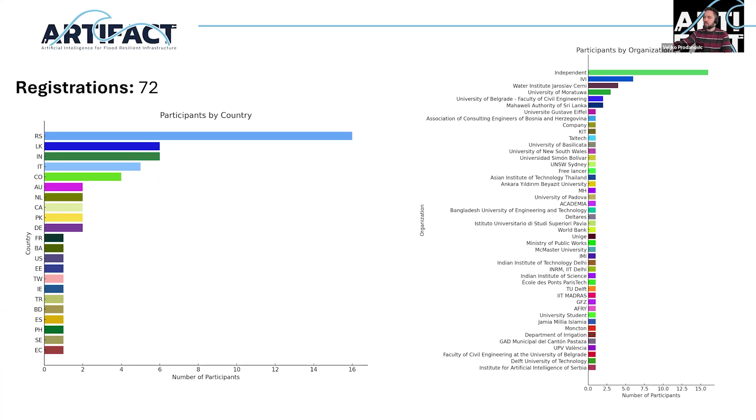I know there's a lot of young researchers among us today. Please ask whatever you think is relevant, or maybe it's not relevant, but you're just interested to ask either Zoran Vojinovic or Kapelan or ourselves. So please engage with us, it would be great to hear your voices. We have 72 registrants for today's event from very diverse countries across Europe and Asia, and most of them are from academia or research, but we have quite a few people working in business or industry sectors. So we have a nice diverse crowd today.

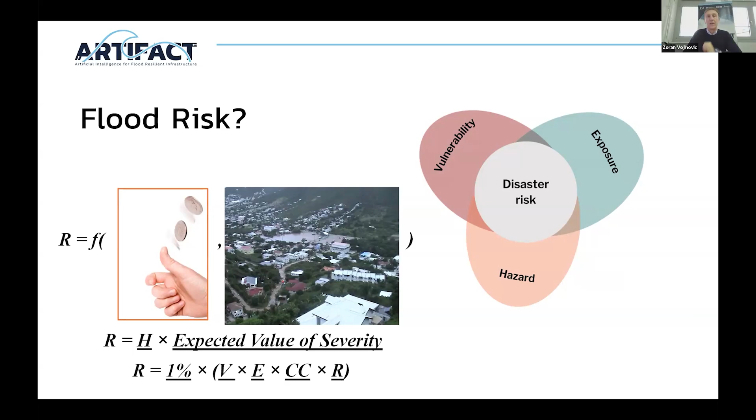Another important point: when we do flood modeling, we choose a particular event to calibrate the model. Once the model is calibrated and fit for purpose, we proceed with running different scenarios, choosing rainfall of different characteristics, such as a potential 1-in-100-year event, a 1% probability. We run the simulations, produce flood maps, compute impacts and damages, and state that there's a 1% chance this event occurs with this potential amount of damage. If we use a 1-in-10-year event, that's a 10% probability, and so on—we can go with 20 years, 50 years—and this is what defines the probability of flood risk.

Since we're going to be doing the modeling, the models are used to estimate the hazards. A hazard is a phenomenon which has a potential to harm humans, so it is a threat, not the actual event. Typically, for our purpose, it is flood water resulting from an event.

Moving on, different rainfall events can be ranked in different ways. You can use variable plotting position principles to rank a series of events, saying this is my 1 in 100 year, 1 in 50, 1 in 20, and so on. Then you use these events to run through your models, and what you get out, if it's 1 in 100 year, is a 1% probability for that particular scenario to occur.

A couple of words about vulnerabilities, because I mentioned hazards in the context of risk. Another important dimension is vulnerability. There are many different definitions in the literature. It can be defined as an inability to avoid potential harm. The disaster risk community defines vulnerability in different ways - I Googled recently and found maybe more than 30 different definitions, but I'd like to stick with one: vulnerability as an inability to avoid potential harm.

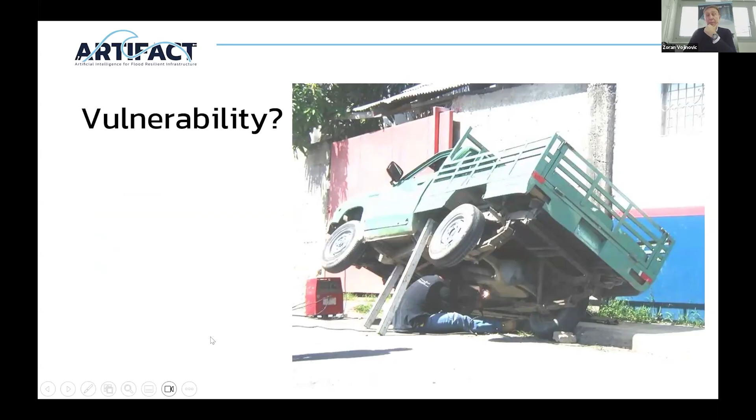These are some sketches to illustrate what vulnerability is. This is a guy who's trying to fix his truck. Obviously you'd say he's vulnerable - the likelihood that he may get injured depends on the poles he's using to keep this truck up. So obviously we'd agree he's vulnerable. You can come up with many examples - other guys working in a particular environment, not very well protected, you'd say they are vulnerable. You can find these kinds of examples in many places.

As I said, typically we break it down to at least two dimensions: hazards and vulnerabilities. Again, vulnerability is one side of the coin - on the other side some people define resilience. Of course exposure is an important thing too. But in practice, particularly flood risk management practice, people combine vulnerability, resilience, and exposure into one and express it in a spatial map using GIS.

On the other hand, we have numerical models to tell us where the flood zones are, and we again represent it in GIS. Two-dimensional models are very convenient to produce flood maps because they're in 2 dimensions, which is much different from a result from a 1-dimensional model, which you need to extrapolate, causing all kinds of problems. So 2D models are great for hazard assessment, and we combine them with vulnerabilities and other dimensions to express the risk.

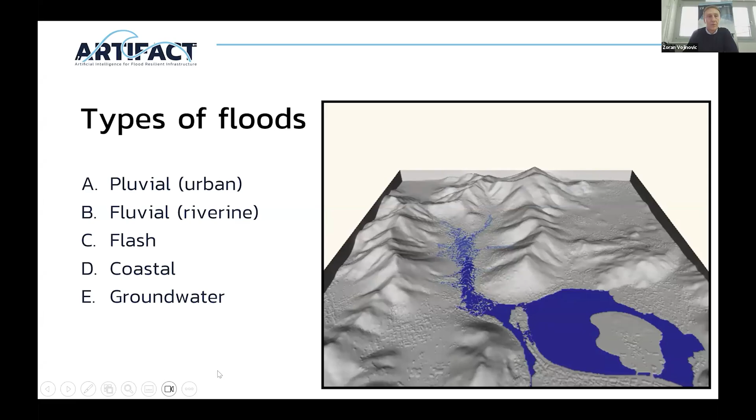And then, of course, you can have combinations. If you have an urban area situated between the coastal zone and also has a river system next to it, and maybe some hills as well, you may find all these combinations. Not very often, but it may happen. So I will speed up through this. This is an example of flash floods from hilly terrain, and this is a simulation of a 1D, 2D model, which I will come to in a bit.

So from the numerical models, when we aim to go into the flood hazards, we obtain water levels, velocities, durations, and maybe if we are dealing with water quality issues, we may also run some advection dispersion processes, and then get concentrations of pollutants. These are the typical variables that we get from our numerical models that we can use to produce the hazards.

Of course, our choice of what to use to produce our hazards will depend on the physics, the terrain, and the type of flood. If it is very slowly moving water, as with some fluvial floods, the water can propagate very slowly in time. In that case, your velocities are not that dominant, and you may end up just using the water levels and perhaps durations as your key variables to express hazards.

If you're dealing with flash floods, then velocities are very important, and you may combine them with water levels, and maybe not so much with the duration of these events, because they can sometimes take just minutes or maybe an hour to dry out.

And if you are concerned with water quality in urban areas, particularly with a mixture of sewage in combined systems, then you may want to look into the advection dispersion processes and the concentration of pollutants into the flood waters. Okay, well, this is what we get from our 2D models, but I will come back to it later.

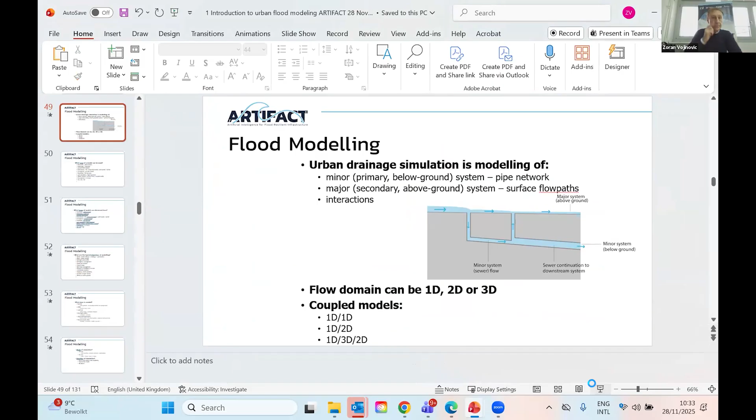I would like to now briefly touch upon some other things. I'll just jump through these presentation slides. Talking about flood modeling, we can look into the drainage system, because the focus of this lecture is on urban areas. What can we find in urban areas? Typically, there is the major and minor system, as people call it. In some places around the globe, they call them primary and secondary. Whatever the case, we will have a pipe network system, which consists of pipes, and can also be in combination with open channels.

We'll have manholes, and there could also be some pumping stations, overflows, things like that. And then you will also have water running across the streets. So at some point, when the pipe network system surcharges, the water will pop out from the manholes and run across the streets, and later the water will also be collected through the catch pits or gully pots, and come back to the drainage network. So there is a continuous interaction between the below ground and above ground systems, and that sometimes plays an important role in our understanding of the physical processes, and our models need to take into consideration some of these interactions.

So the flow domain can be one-dimensional, two-dimensional, or even three-dimensional if you want to. And of course, the coupling between these models can be in the way of coupling two one-dimensional models, or coupling one-dimensional and two-dimensional, or you can even incorporate a third-dimensional model.

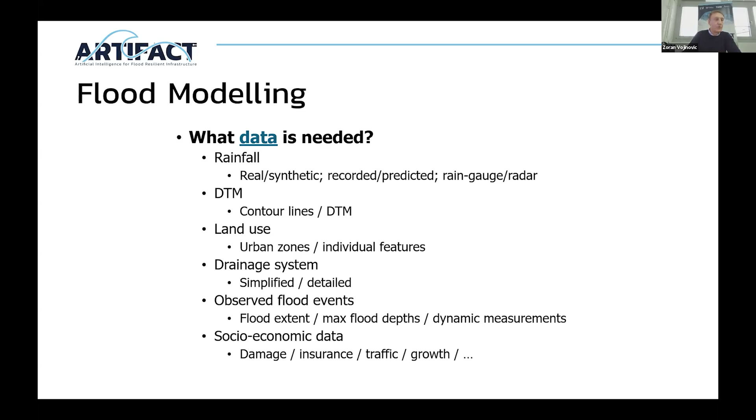Sometimes we're dealing with very scarce data, the amount of data can be very little, but even then we can set up the models. This is where physical-based models are good, because they're based on physics - even with little data, you'll be able to produce results you can make use of.

In terms of the mode of simulation, typically you can run models offline or online. If you're using models for real-time control and operational purposes, you can connect them and run them online. Otherwise, if you're running models to assess impacts from different scenarios, previous or future events, that would be an offline mode of simulation.

Duration of simulation - more complex models compute the entire domain, particularly with two-dimensional terrain and high resolution, which takes much longer than running only a 1D model without connecting 2D models. The size of the system, complexity, and type of model matter too. A simplified equation like a kinematic wave versus full dynamic wave makes a difference in time, and of course it depends on the hardware used to run the simulations.

I'll just mention quickly the different flood modeling approaches, and then we're going to break for 5 minutes.

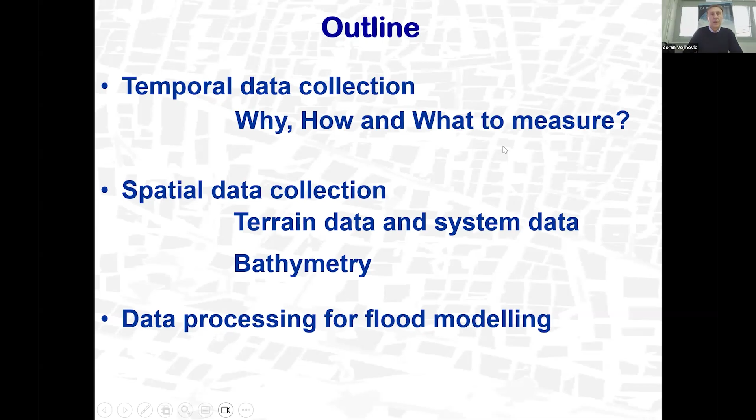Most of the slides I'm showing here come from these two books, Urban Hydroinformatics and Flood Risk and Social Justice. So the question is, why data collection for temporal time series data, which is typically rainfall, water levels, velocities, or discharges.

If we are dealing with water systems in urban areas, utilities, we obviously don't want to have a problem with malfunctioning of our system. So we need to learn how our system works. Besides knowing where the pipes are, we need to know how our system responds to dry weather flows and wet weather flows.

We need to answer many questions as we deal with such data and systems. For example, a typical question is: do the stormwater pipes surcharge when it rains 10, 20, 30, 100 millimeters an hour? This matters because water managers need to know if they will block traffic in certain areas or inform the public not to go there.

Another question that often comes to water utilities and urban water managers deals with combined sewer overflows or sanitary sewer separate overflows: will these overflow points spill when it rains? What magnitude of rain will cause spilling? And how much of that spill will get into the receiving environment?

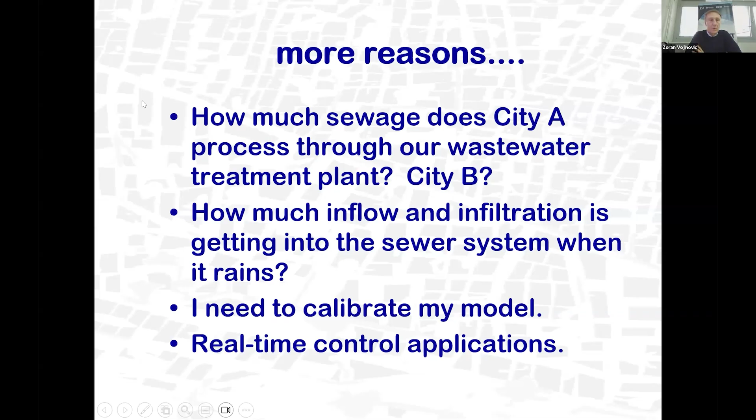But for our discussion today, we very much need this data to calibrate our 1D and 2D models. Of course, you can also use it for real-time control applications and many more things. So what do we typically measure and how do we measure it?

We use sensors and meters, structures in the pipes. We can install structures to measure the flows, or use portable devices. What's typically measured is the depth, water depth or water level, and velocity, and of course we can combine these into quantities, into discharges.

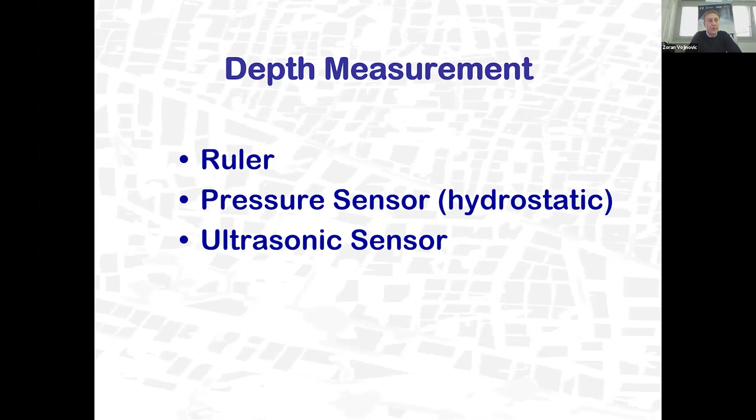The depth measurements, the depth of flow, we can use rulers, pressure sensors, typically hydrostatic pressure sensors, or ultrasonic sensors, which are typically mounted on the top at the soffit point of the pipe, and then measure the space between the soffit and the water as it rises through the pipe network system.

In terms of the ruler or depth of flow stick, they are easy to use but very limited, because you cannot stay at a particular location and get readings for hours. You go at a particular time of day or during an event and take some readings, but they are very limited, and they may not be very accurate because debris and deposits in the pipes can make it hard to read the accurate depth. So that's a very limited device.

Pressure sensors measure the difference between the water and air pressure to determine the flow depth. To work properly, they need to be covered with the flow. The readings can drift sometimes, so we lose accuracy, and you need to recalibrate these instruments from time to time. Because pressure is an important aspect, and in sewer systems you may have different gases causing pressure changes, you may need an air vent to get proper readings.

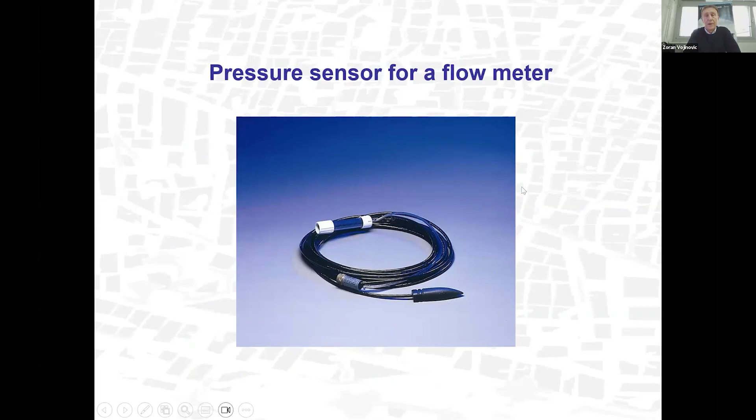This is an example of a pressure sensor - how it can look. It's typically on a cable, and you put it at the bottom of the pipe, fixed on a ring, and the other end of the cable goes into your logger for installation. The problems are: if there is too low flow, you will get scattered data readings, and sometimes we can experience loss of power.

Ultrasonic sensors can be used for depth measurement. They measure the airspace above the flow and use sound reflections. As they use sound and reflections, they may run into problems if there are road works where workers drill the surface and create noise that may interfere with your readings - that's something to be aware of.

Ultrasonic sensor instruments use an ultrasonic signal around 40 kilohertz, which humans cannot register, since our hearing range is between 20 hertz and 20 kilohertz.

As I said, they can be affected by noise and signal direction. This is a typical flow meter installation where the sensor is installed on a ring, and the other end goes into the logger and hangs in the manhole. From there we can receive the data wirelessly in our office, or you can come with a computer and download the data on the spot.

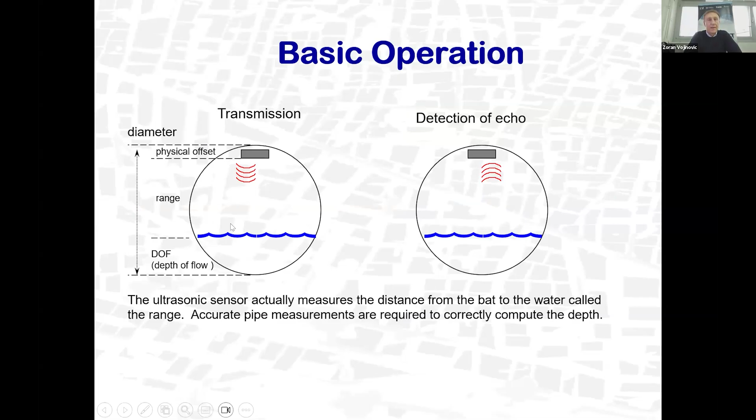So the typical operation of an ultrasonic sensor involves transmission and detection. What's measured is the airspace between the soffit - the top point of your pipe - and the water level as it rises and falls.

Then you have a cable that goes into the logger, and as I said, you can come to the site and download the data, or use the wireless system to do that.

What we like to do when we install these devices is also install a rain gauge in the same vicinity, because if you're going to use this data for model calibration, you need the rainfall driving the flow through the sewer pipe network system to correspond in timing and be in the same area. Then we have data we can use for calibration, which we'll talk about later.

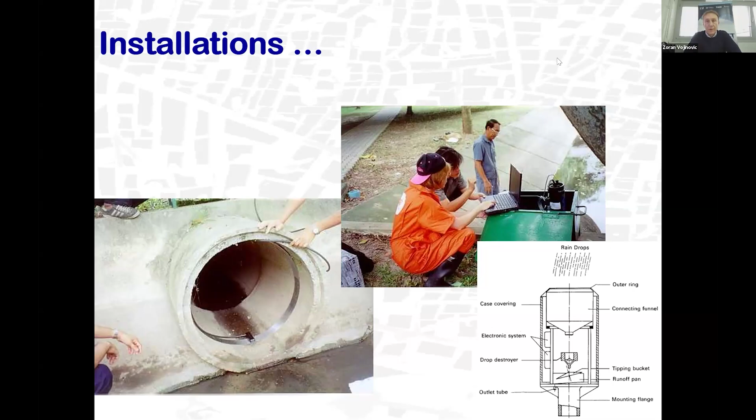So the problems with ultrasonic sensors - there are many potential problems that can happen. But if we engage experienced contractors to do that, then the problems will be minimal.

We can also measure the velocity with ultrasonic Doppler meters, among other devices. The velocity sensor can be positioned at the bottom of a metal ring that takes the shape of the pipe diameter, and then you have two crystals there. One crystal transmits the ultrasonic signal, and the other senses the signal reflected back from particles flowing through the water, and what's measured is the time it takes for the signal to come back.

That's the principle behind it. There are different configurations for different sensors that can be positioned in different places to get the timing and give you the velocity readings.

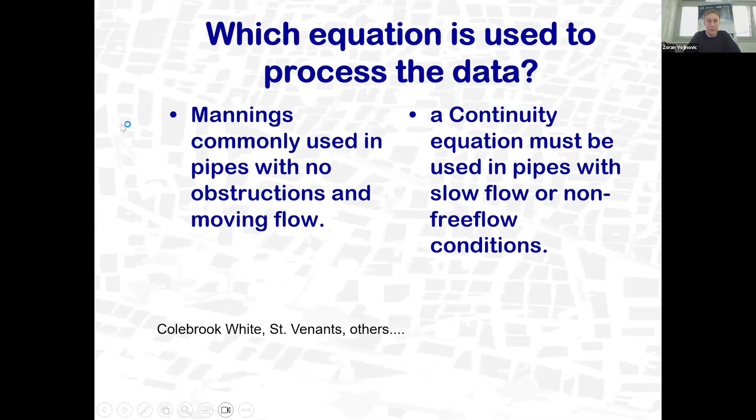So which equation is used to process the data? We can use the continuity equation, and we can use Manning's equation, which is typically used to process this kind of data. But again, if you engage a contractor experienced in doing that, they will give you data in whatever format you want.

Sometimes we may opt to install primary devices such as weirs, flumes, and other magmeters. But nowadays, I've seen many more people using ultrasonic sensors, velocity sensors, and pressure sensors.

Moving through this, I personally have worked with ADS instruments, and there are many others you can find on the market. I put this list together some time ago, but nowadays there can be many new players on the market offering their instruments. I personally worked with ADS, and I have a pretty good opinion about their instruments and their work.

A few things we need to be aware of: like with any recording, even with cameras we have nowadays, the data storage is limited. If we run to the end of the capacity of our storage, it may start recording over the old data or may stop. So we have to be aware of that and act in time to make sure we have our recordings for the entire period we want to record.

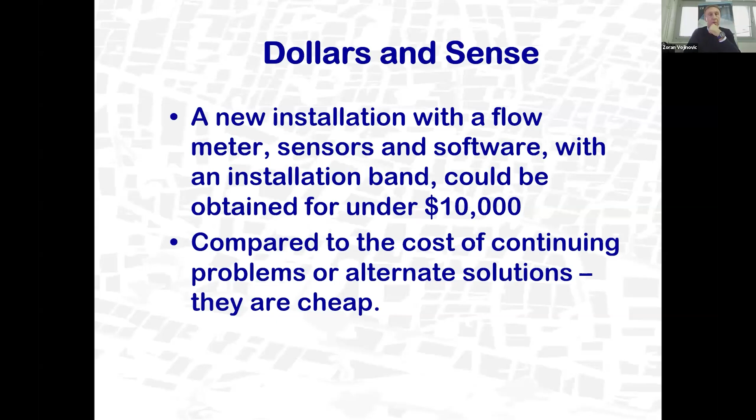And this data is very, very important. Sometimes it can help us really understand what we are doing and what's best to do, even before we set up the numerical model.

Now, the question is how do we pick a good location to install these instruments? It's not equally good to put them where you have large head losses. For example, if you have a head loss due to elevation, where one pipe comes in at a certain level and the outgoing pipe in that manhole goes, say, 1.5 or 2 meters below, you're going to have a large head loss there, and you will want to avoid it.

Or if you have sharp bends where the pipe changes angle, we also need to be aware of electrical connections and telephone connections for transmitting wirelessly through telemetry and SCADA. And of course, we need space for installation, sometimes a large space.

We want to avoid broken pipes, because if there are structural problems with the pipe network systems, we don't want to leave instruments there, since they can get stuck. We also need to avoid obstructions such as rocks, or maybe root intrusion from the pipes, or drop connections.

If you have heavy inflow infiltration, you also want to avoid that. Slope changes will again cause a change in the flow regime, maybe from supercritical to subcritical, resulting in hydraulic jumps and things like that. So you want to avoid these locations, because your readings may get scattered and you get erroneous results. Any place with velocity changes can cause this.

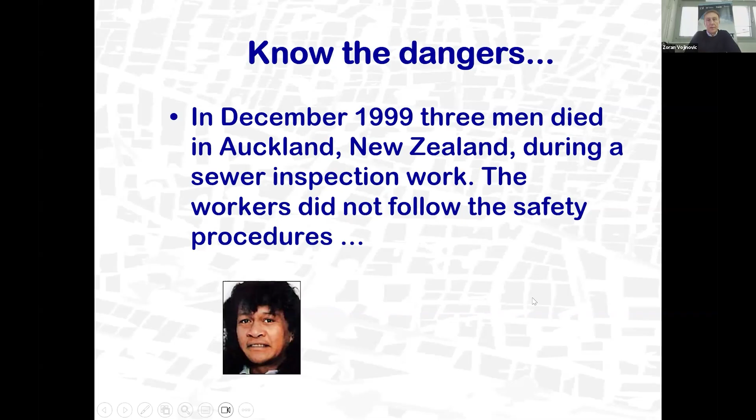I worked for many years in New Zealand, and I've lost some colleagues. One of them was Ken Carew, who I like to always mention. A very experienced guy, he worked in Auckland City and knew the sewer system very well. But even Ken got into a problem with the gases, and he and two other guys died on the same day when they were accessing the sewer system without full equipment.

Also, we need to be prepared for other things. It's always good to ventilate the sewer system.

I remember there was a case once where, if the sewer system or stormwater system is quite large and you have a variable topography with spatially varied rainfall across the city, you might have a storm in one part of the city while another part is dry. If downstream is dry and upstream the rainfall is happening while you're doing work in the sewer system, and you don't know that a flood wave is coming through, you may get flushed through and encounter all kinds of problems.

This needs to be very well coordinated, and all these works really need to be carefully planned, along with other preparations. Manhole covers are very heavy, so obviously we need proper equipment to deal with that.

Another interesting feature is that this equipment needs to be intrinsically safe, meaning it should not cause any sparks or situations where you can get an explosion. In the past there were some situations like that, but nowadays manufacturers of this equipment often put an Ex mark to indicate that their equipment is intrinsically safe.

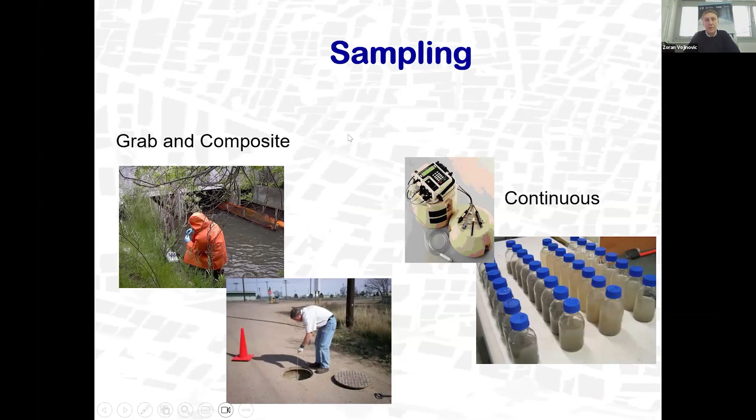So if you want to study and analyze the impacts from the sewer system on the receiving environment, this is very important, and also for other types of ecological ecosystem monitoring.

A couple of words on rainfall measurements. Typically, we use tipping bucket rain gauge types. These rain gauges have a tipping bucket, illustrated here: you have two small spoons, where rainwater goes through the funnel and fills up one spoon, which then tips and sends a signal that a particular depth has been produced.

Then the other spoon empties and goes up—one gets filled up while the other is empty, and then it alternates back and forth. This can happen very frequently, interchangeably, depending on the magnitude and intensity of the rain.

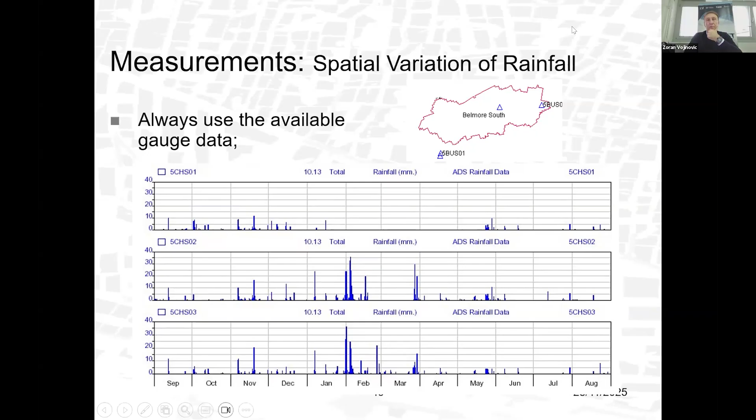Now I'm going to jump in, we have another 10 minutes. I'd like to spend a few words about spatial data collection, which is very important, particularly when you want to set up two-dimensional models.

I mentioned before, for one-dimensional models, we deal with pipe network systems, typically in urban areas, where for every manhole or node we need X and Y coordinates, and then the Z value, which is the ground level and invert level. We need pipe diameters - all this geometry data is important. We put it into the 1D model.

Now we go to the 2D model. How do we go about data collection? Well, we deal with terrain data, and there are different ways to do that.

In urban areas we also have different obstructions to the flow. So when the streets fill up with water, it depends on the curb heights - the water may stay confined, and depending on the intensity and amount of rain, the water may stay confined to the curb network and flow in parallel with the pipe system, which is typically under the roads. And then when the water exceeds the curbs, it will spill around.

There could be other aspects that we need to be aware of. So we can do ground surveys, obviously, which is a traditional way using the total station.

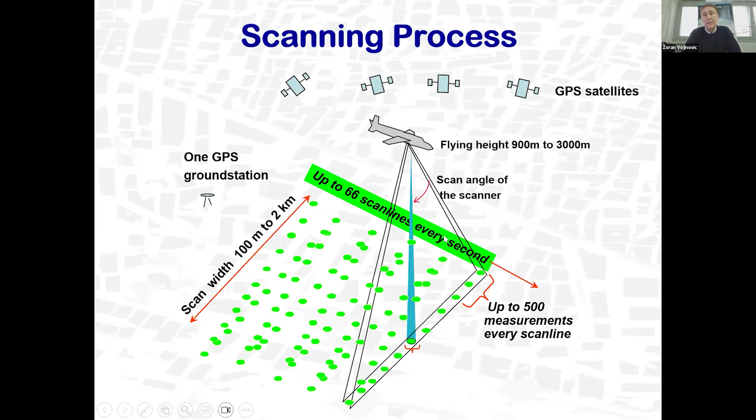So the point cloud data then needs to be carefully filtered. The data can be really collected in so many ways, flying along the scan lines and collecting large amounts of data every second.

So what we need to typically do, because we're dealing with flood management or flood modeling, we don't need to know the height of morphological objects, trees, bushes, and things like that. So what the person collecting this data needs to do is perform morphological filtering.

And then perhaps you may also want to remove the heights of the buildings, because dealing with floods, we may not need to know the heights of the buildings. It may be sufficient for us to use only the bare earth data sometimes.

And then obviously we need to interpolate when we extract this object. We need to interpolate in between, and that's typically done by the contractor who does that. And then we may get something like this, which we can use as a basis for our two-dimensional model.

And then that model, the intention is to couple it with a pipe network or open channel model, which the two together would in conjunction produce the water depths and velocities that we can then project into our maps or 3D visualizations.

I mentioned before that the pipes are very important, the pipe network system. So we measure the diameters, we measure the invert level of the outgoing pipe and the incoming pipe in terms of where it comes into the manhole. Is it at the bottom of the manhole or does it come a little bit higher than that? Is there any internal or external drop?

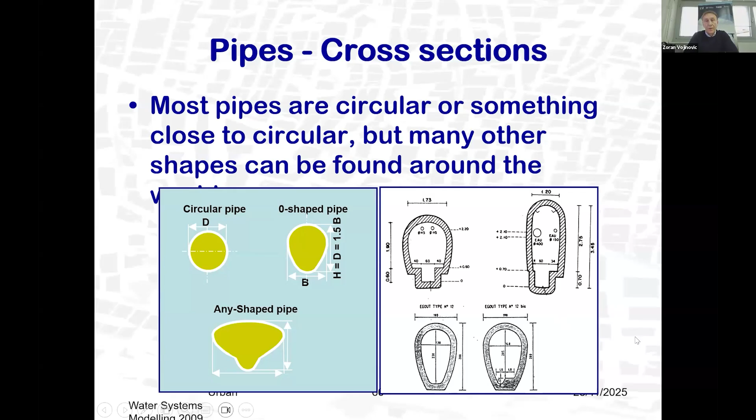For the manholes, we need the ground level, inlet level, manhole diameter. If the pipes are up to 1 meter, they would typically have the manhole diameter as standard, which is 1 meter. And if the pipes are larger, there may be some chambers that can be quite deep. So in that case, we need to get all these dimensions because they will act also as storage units in our pipe network system.

Pumping stations are also very often a part of our urban drainage network. For those, we need to know the wet well, dry well dimensions, what's the storage there, where is the inlet, and of course the pump characteristics, QH, head and flow relationships that we normally would put into our 1D model.

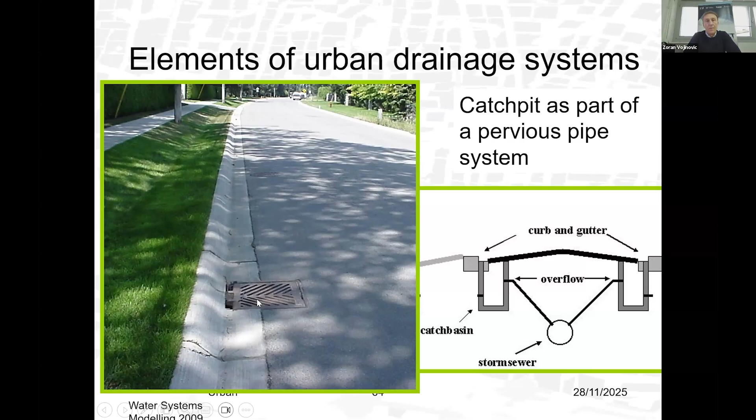Another important thing to consider when we collect the data for the 1D, 2D models is the number of gully pots or catch pits or catch basins, whatever you call it, to see the efficacy of how the water from the streets will get into your pipe network system so that you can potentially set it up in your numerical model.

Another important aspect is the overflow structure, and sometimes we may have a combined sewer system, or a separate sewer system, the water may go from one part to another, and these heights and all this information is important to know. And then finally, outlets.

We need to know the outlet, at which level is the outlet, and also if that outlet goes into a receiving water, where is the water level of that receiving water, because this will form the boundary condition for your one-dimensional model, which is very important to get a good representation.

Besides the pipes, we may have culverts and channels. In some urban areas we deal with open channels, so you may have a heterogeneous network combining closed conduits and open channels. When you have open channels, you may also have culverts and bridges, which can sometimes impose serious restrictions to the flows.

That's very important to be incorporated into the one-dimensional model. So these types of structures, pipe networks, open channels including culverts, channels and bridges, we would normally put into the 1D model, and then couple that 1D model with a 2D model. The 2D model computes only the overland flows on the surface.

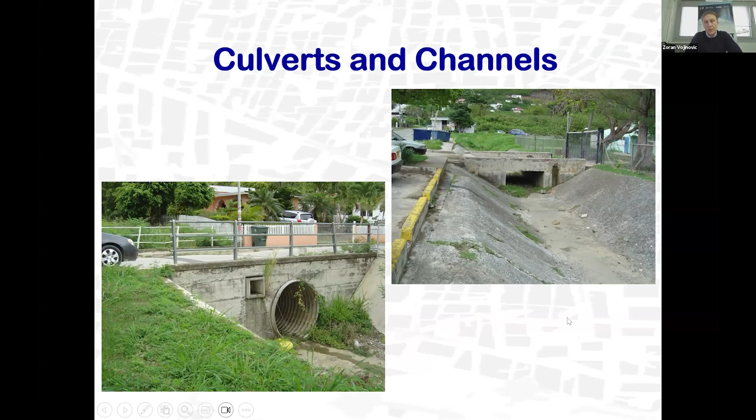If we have some retention or detention basins which act as part of our drainage network, we would obviously like to know that. This can be incorporated and typically can be done also in a 2D model, but traditionally we would normally incorporate this into the 1D model.

Another important aspect when doing data collection is to look into the condition assessment of our drainage network. Our pipes can be quite old and deteriorated in terms of quality, and that will directly affect the roughness coefficient values we want to use for our 1D model channel.

Whether it's a pipe network or open channel network, we need to perform inspections. Sometimes we use CCTV cameras run through the pipe network system, or do visual inspections for open channel networks, and then try to work out the most appropriate roughness value to use.

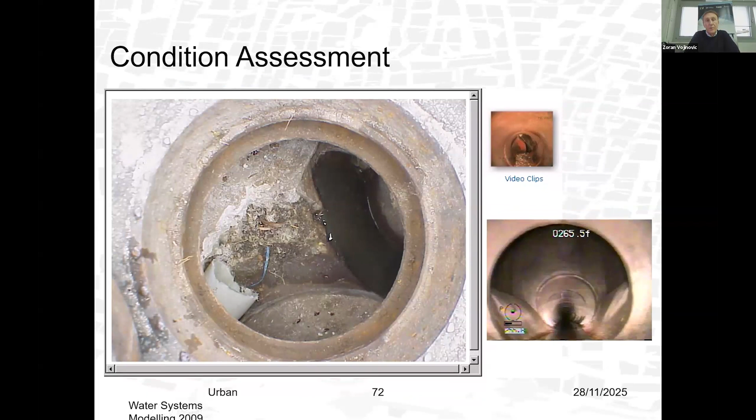Another thing to be very much aware of, from practice, I've seen many cases where people illegally connect their household pipes. Particularly if you have a separate sewer system with a sanitary sewer, they connect their rainfall pipes, and you may spot this kind of structure. When you measure the flow, you may see a rapid response to rainfall, which indicates direct inflow, and that's an important piece of information for the models.

Sometimes the condition of your pipes can be so deteriorated that no roughness coefficient will help. You need to take into consideration that the network is in a deteriorated stage. So besides collecting data from the field, we also need to do field visits and observations to see if there's anything particular to pay attention to when setting up the models.

This comes to the end of setting the scene of flood modeling, looking at what kind of models we can use. I mentioned 1D, 2D, 3D, and went through the time series, temporal data, and spatial data we need, including data for the 1D model, which is the geometry of the pipe network and open channel network, and for the 2D model, which is the terrain data.

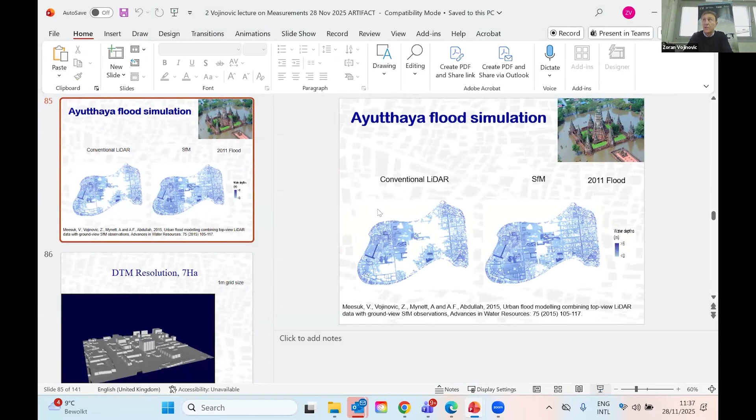Exactly, so the publicly available data might not be of sufficient use, and I can show an example very briefly of the problem with having this data. This is an example of a model simulation result — I'll duplicate the slideshow.

One thing is to collect the data, but then it's to verify with the objects on the ground, particularly in urban areas.

In urban areas, you can have all kinds of problems. You can have narrow passages between the buildings that the conventional LiDAR data will not be able to pick up. If you have, let's say, a 0.5 meter gap between two buildings, which will allow water to come from one side to the other, but if you're aiming for 1 meter spatial resolution, your LiDAR will not provide you with that gap in between.

And then you may get a totally different flood map from one where you can open these gaps. So on the left side is conventional LiDAR, which shows more of the dry areas compared to the right side, where we use the structure from motion technique, where we ran a survey through the city taking photographs along the way, with the camera mounted on the car. Sometimes you can do it with drones as well, running the vehicle through the city.

You collect this information about these gaps, and you go and correct your LiDAR data, and then your model will produce a potentially totally different result. This is the case in Thailand, in Ayutthaya, where we produced the data using conventional LiDAR, and then we cleaned this terrain data with structure from motion, and got a totally different flood map.

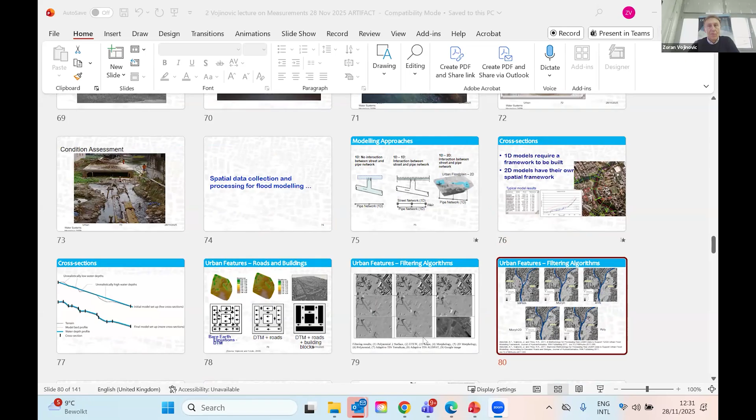We also talked about data collection for the geometry of the system and for spatial data. I'd like to mention a couple more things about data to conclude this. This is one of my PhD students from Malaysia, from University Putra, who graduated at IHE and TU Delft. In his research, he dealt very much with airborne laser surveys, looking into data collected from lidar and how good the algorithms are that filter different objects. What you see here is a different DTM produced with different lidar filtering algorithms, because a lidar contractor collects a lot of data points as point cloud data.

Then he or she will go to the office, filter different objects, and then apply some of these filtering algorithms. These are some of the commercial algorithms that you can see here, 5 of them.

My student back then, but nowadays he's a full professor at University Putra, Malaysia, applied these algorithms for flood modeling in Kuala Lumpur, modeling the Klang River and urban area. He coupled 1D and 2D models, the 1D model being the same in all 5 different simulation results. What varied was the DTM or 2D model setup, because he used 5 different commercially available LiDAR filtering algorithms, coupled these DTMs with the river and drainage system model, and produced flood maps.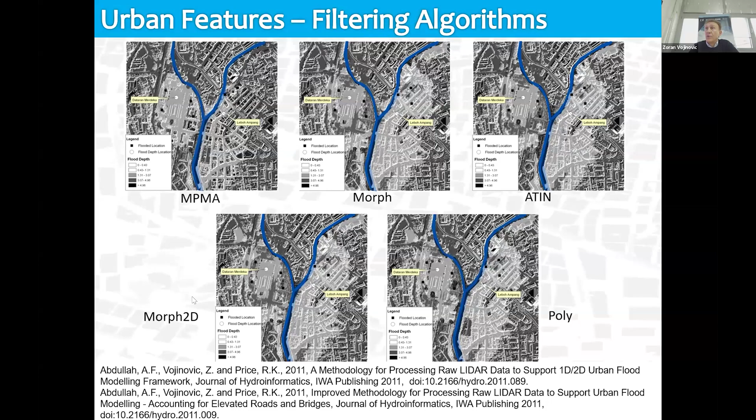What we can conclude is that the flood maps differ quite a bit using different LiDAR filtering algorithms, and he concluded none of these algorithms is fully suitable for flood modeling. Depending on terrain configuration, complexities, and features in the urban area, some will be more or less sensitive to picking up certain shapes. So if you run different LiDAR filtering algorithms on the same catchment, you may get different flood maps. This is something to be aware of, and to potentially look into alternative algorithms. My student worked on his own algorithm that he claimed works better than any of these commercial ones.

I mentioned the gaps between buildings — this is another PhD student we had from Thailand, Vorawit Meesuk, who works for the Hydro Informatics Institute in Bangkok. He worked with structure from motion. This was back in 2011, 12, 13, immediately following the Great Thailand floods. He first used a bike, then a car, then a drone to mount the camera, improving the LiDAR data taken from the air.

In Thailand, when you have this kind of structure, if you take LiDAR data from the air, from the aircraft, you get a solid block of a house. If you take that straight into your 2D model, you get an obstruction to the flow. Whereas if you actually drive along the road, you observe this is a pillar house, which allows flow underneath.

There can be different objects that cause this kind of problem. This is a summary: you can see this arch-type structure, for example, which taken from the air can close the space completely, whereas water can actually flow underneath. Sometimes very dense morphological objects can also cause errors or block off spaces — that's B. C is the narrow passages between buildings.

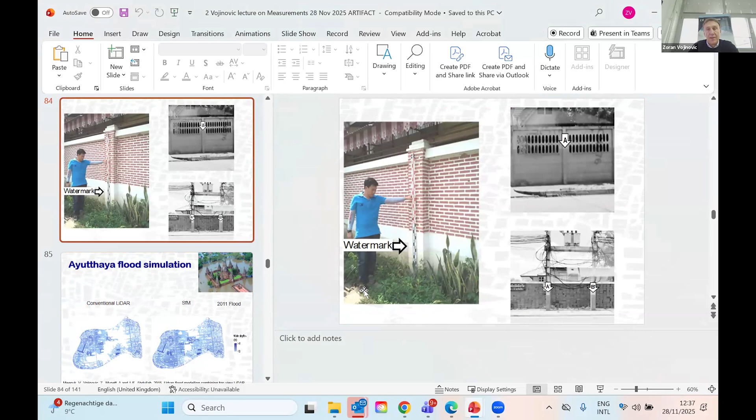Also, what's interesting is when we deal with calibration — I'm going to talk in a moment about model calibration before getting into the other part of the 2D model setup. One of the biggest challenges with 2D models is how to calibrate it. But before that, I'll briefly talk about the general process of calibration. Let me just find the particular slides I want to show.

Sorry. Yeah, here. Let's put this somewhere here.

If we collect data for flood modeling, we need to have the rainfall and the flows taken at the same time, and then we need to compare the data. And this is the slide I was looking for.

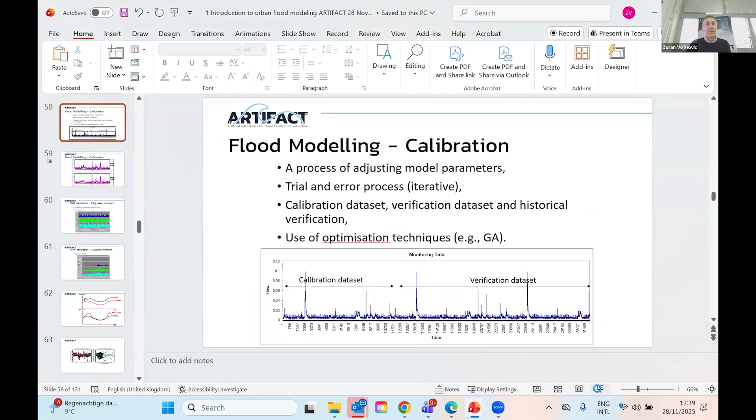Speaking of model calibration, which is very important: it's a very important activity, because if we don't calibrate our model, we potentially can either overestimate or grossly underestimate the flood depths, which may lead to suboptimal design of flood protection structures and even create further problems.

So what is model calibration? Model calibration is a process of adjusting model parameters. Speaking of 1D models, we have the hydraulic parameters, like surface roughness in our pipes, but also hydrological parameters. Hydrological models have their own uncertainties - some parameters carry a large degree of uncertainty, some a smaller degree, but this all propagates uncertainty and creates difficulty in settling on a particular set of parameter values.

So in that case, we aim to perform measurements and then dedicate one particular set as a calibration dataset and the other set as a verification dataset. The idea is to try to match the two curves. Let's suppose you have your model in blue and the gauge in a kind of fuchsia color. You may get a good match between model and measurements on small flows, but for some intermediate and larger flows, maybe you have more problems. Then the idea is to adjust the model parameters so you get a more perfect fit.

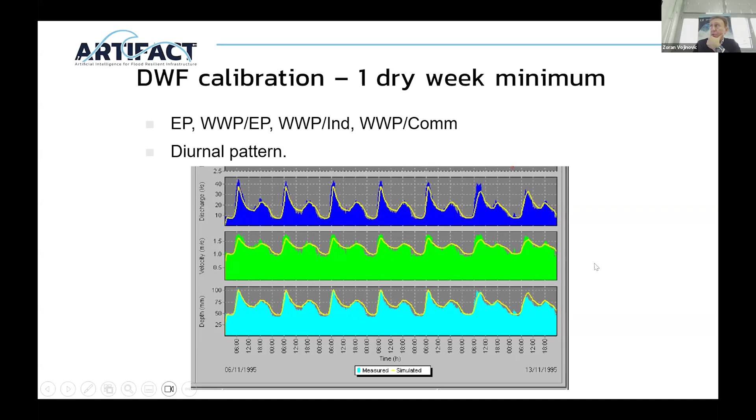If you're dealing with this kind of network, with combined sewer systems, you would first attempt to do the proper calibration, as best as you can, with your dry weather flows, and then go to the wet weather flows, which is the rainfall-driven response in the system.

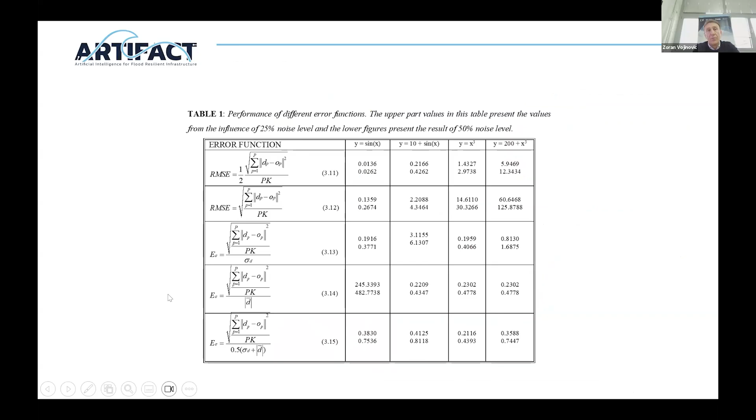And then the question comes, what kind of statistical error functions can you use? The classic ones are root mean square error, coefficient of efficiency, Pearson's coefficient, and so on. Usually we would like to pick a few of those and then analyze the quality of our calibration work.

So the calibration procedure for the hydrological part of the model is to adjust the mass balance, area initial loss, depending on the hydrological model, and the timing of the peaks. Then you come to the actual pipe flow modeling, or hydraulic calibration, which looks very much into your surface roughness and the head losses and things like that.

So that's about the calibration business, and I would now like to touch upon a little bit on the actual model setup, and then we'll go into the case studies.

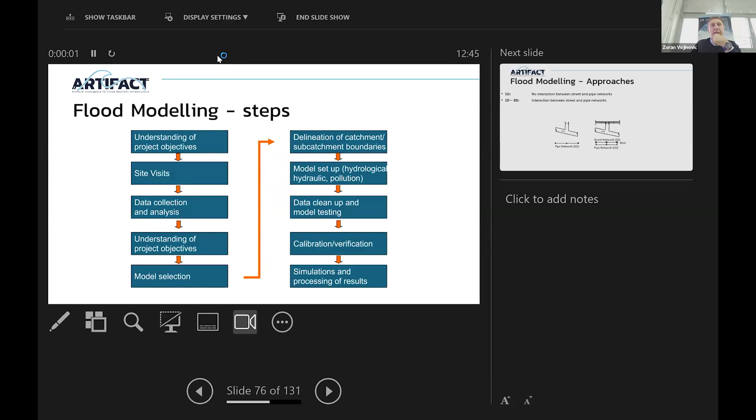So the model setup process can go through different steps. I will just show you a typical sequence. Of course, we need to understand the project objectives. Why are we doing it? What's the purpose? Is it that we are setting up a model for real-time control, or maybe early warning purposes, or are we setting up the model to run some simulations, to run some scenarios, and to look at some potential design of measures?

That will drive the degree of resolution of the data you need to collect and what types of models to use. Then it's always very valuable to perform site visits and get familiar with the areas that you are turning from the reality into the digital twin. Then we collect the data, as we talked before.

Again, I like to emphasize coming back to the project objectives before you choose a model. Are you just designing maybe a new pipe network system, where a 1D model is good enough, or are you looking at the existing system performance? Then, in terms of floods, you obviously need to deal with a 1D-2D model.

Then once you choose your model, you need to perform the catchment delineation in terms of sub-catchment boundaries, set up the hydrological and hydraulic model, maybe pollution modeling as well, and then perform data cleanup.

We talked before, in the first break for questions, about the need to perform QA analysis of the data that you get from the water utilities.

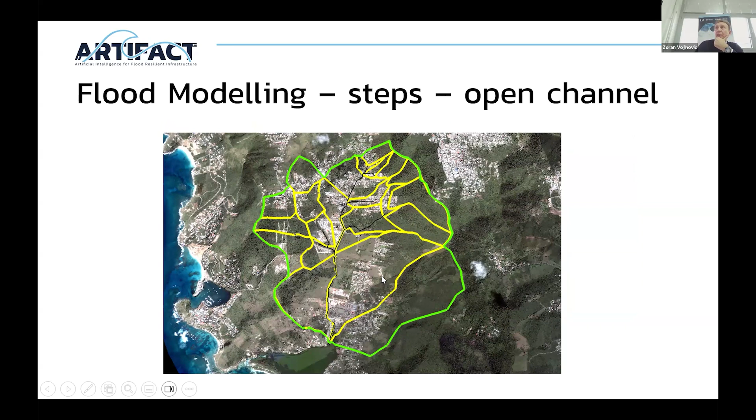Then you put on top your network, either open channel or pipes. Here, this is open channel. And then you set up your branches, if it is the open channel network.

Look into the sub-catchments, look into the hydrological properties like percentage of perviousness, imperviousness, slopes, things like that. And then you set it up for each of the catchments, from C1 to whatever. And then you look into your channel network.

And then you need to define the loading points. And that's pretty much it, what you need for the open channels.

If you look into the pipes, I will quickly jump into that. But before I do, what's very important is that if you're dealing with the open channel network, you have to think about the resolution in terms of your cross-sectional areas.

Suppose this dashed line represents the terrain topography, and if I would have only two cross-sections, one upper and one lower, what's going to happen? The model is going to interpolate between the computed water levels, and if I have irregular topography going up and down, I may create unrealistically low or unrealistically high water depths, and that's a problem if you want to project this data.

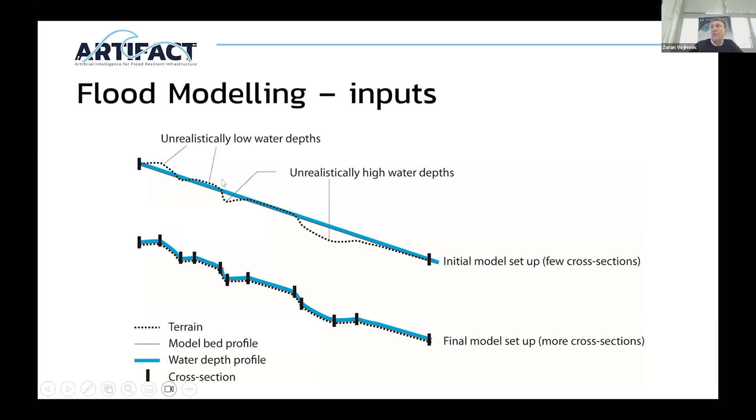But of course, when you have a 2D model, the 2D model would take care of it. If you're running only a 1D model, then it's a problem. To overcome this, you need to introduce many more cross-sectional points to capture all these terrain irregularities in order to get more realistic water depths. So this is for the open channels.

Now for the pipes, the procedure is pretty much the same as for the open channels. We start with a catchment boundary, delineate into sub-catchments, and then overlay our pipe network system conveniently in GIS. The red dots represent the nodes or manholes, and the black lines represent the pipe network.

When we set up the 1D model, we need to give unique IDs for each and every element of our pipe network system. Every manhole should have a unique ID in a database, like MH1, MH2, for example, or it can be all kinds of combinations of letters and numbers.

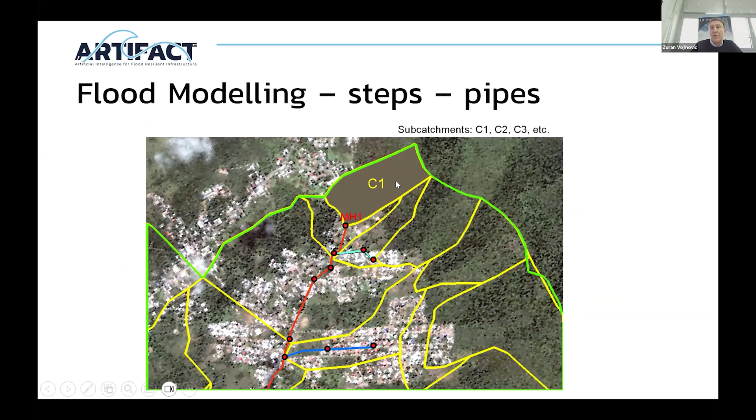Then we need to delineate or define our sub-catchment properties, same as for the open channel, ending up with different sets of parameters in terms of hydrology. The next thing is to define the loading points for these sub-catchments, in terms of which parts of our pipe network system will receive flows—your upstream boundary condition—and then you need to set up the downstream boundary condition.

So these are the steps, and then you end up having a 1D model. Now I'm going to jump into the case of Dhaka, to take you through the steps of how to set up a 2D model.

I had a stream of students coming from Dhaka, and this is one of them, Farhana Ahmed, who collected some interesting data, and we've worked with that. We now have a very interesting exercise, and for colleagues who come to our summer school in Delft, we'll actually be working on this case, setting up the 2D and 1D models, running the simulations, and turning these results into data to set up the data-driven or AI models. But we'll talk about that in summer.

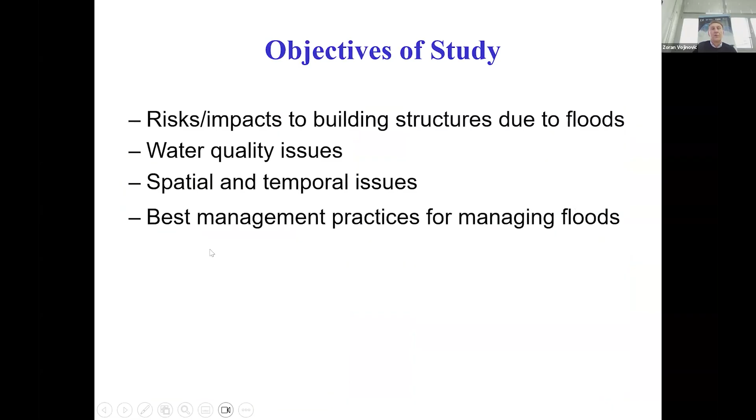The objectives of the study from Farhana's work were to assess the flood risks and impacts to building structures due to floods. She has also looked into water quality issues, spatial and temporal issues, and best management practices for managing floods.

On top of the hydrodynamic flows, she switched on advection dispersion and sediment transport, and looked into these properties in the system. But we are not going to go into the water quality or sediment transport aspects this time. We're going to just look into the 1D, 2D model.

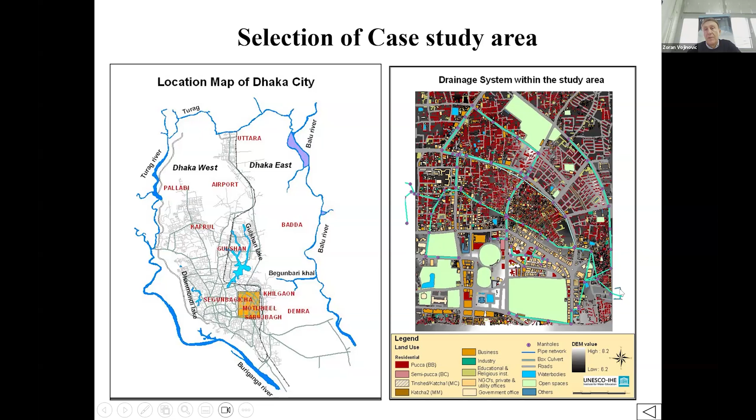This is how the system in this particular area looks like - it's the pipes, box culverts, and open channels.

There is also a pumping station there, and the sluice gate strategy that was used to set up this model. You have the pump, and there are some sluices that open up depending on the drainage level upstream and downstream from the pumping station.

If there is low water upstream, then the sluice would be closed and the pump would work. When there are larger flows, the sluice will be open. This was very interesting because we also looked into some real-time control strategy, but this is not the subject for this.

What was very important is to look into the gully pots, the catch pits, the cesspits on the road. We often, when we set up the models, assume these small structures, which are very important, take the surface water from the roads into the pipe network system.

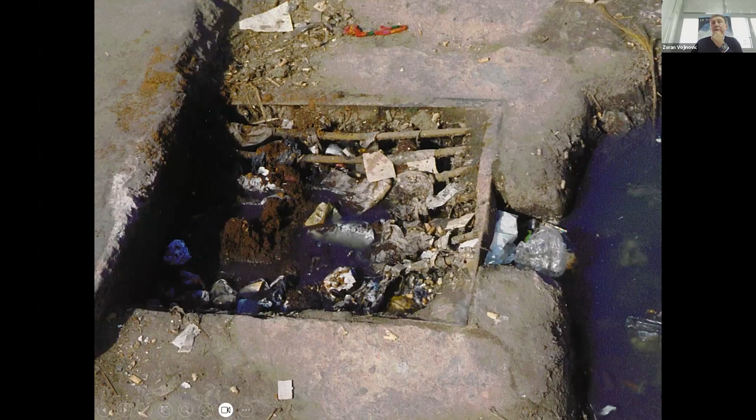We often assume they are spotless, but it's not always the case. Not only in Dhaka, but in many places around the world, this type of important structure gets filled up with debris or litter, or sometimes covered by leaves, and they simply don't function. So you may have flooding just because your catch pits are blocked off and don't drain the water into your pipe network system.

That's why it's important to visit the catchments and look into the actual condition before you set up your model parameters and before you start running your models.

The problem is you don't get a proper representation of what happens when the water starts spilling across the terrain - that estimation is very rough. That's why the 2D model is very important.

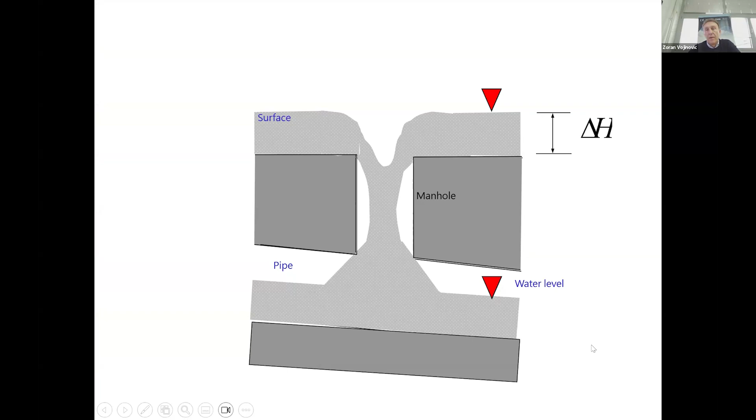In the 1D model structure, you need to set up the weirs to connect the below ground and above ground 1D models, with the crest weir set at ground level. The two models would then exchange depending on the head difference between the surface and pipe flows, and the water would go either from the surface into the below ground, or the other way around. So this is the 1D model, which is an interesting way to think about it.

Sometimes you may want to choose that, but we are going to go into the 2D model. So how do we set up the 2D model in Mike Plus or Mike Urban?

The history of Mike software, particularly for urban flows, starts from System 11, which was developed some time ago by Professor Abbott and his colleagues at DHI in Denmark. They developed a one-dimensional tool, which later split into two packages: the one for pipe networks went on with the name MOUSE, Modeling of Sewers, and the other went ahead with the name Mike 11. Nowadays MOUSE is very much 1D, called Mike Urban after a few name changes.

Now all of it is under Mike Plus, and Mike Plus contains the one-dimensional model, but also the two-dimensional model. The two-dimensional model is Mike 21, a two-dimensional one-layer model developed for coastal system modeling, and then of course they have Mike 3. But the two-dimensional model is really well connected and made applicable for modeling flows in urban areas.

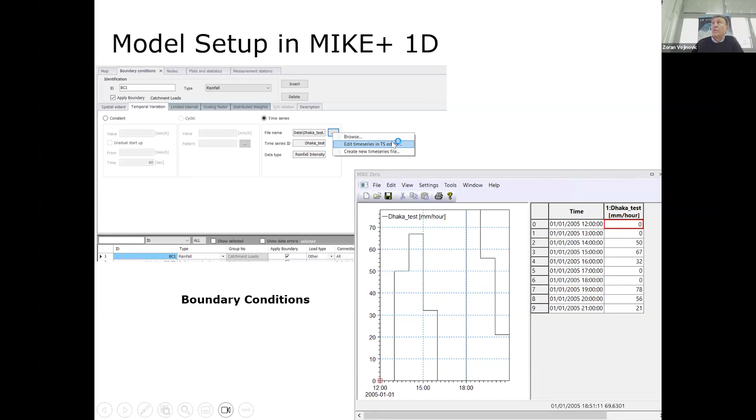For the hydrological part it's very important that you set up your rainfall time series. This is how the time series editor looks. What I have here are a couple of events, reflected in terms of time and millimeters on the right side. So you create your time series data.

Depending on your hydrological model, you can also set up different parameters. If you're dealing with combined sewer flows, as in many places in the world, you may need to set up domestic wastewater too. This can be added in terms of diurnal variation, as I showed before when talking about calibration: the dry weather flow related to the number of domestic people times wastewater production per person per day, distributed through diurnal variation over 24 hours. You define all of that and put it in.

Then we set up the boundary conditions. Rainfall drives the upstream boundary condition. The downstream boundary condition for the 1D model is set up at the outlet points, so at the outlet of your pipe network system you need to set either a fixed or variable water level boundary condition. For example, if it's a coastal system, you may want to adjust for tidal variation in how the time series looks at the outlet. But that's the downstream boundary condition.

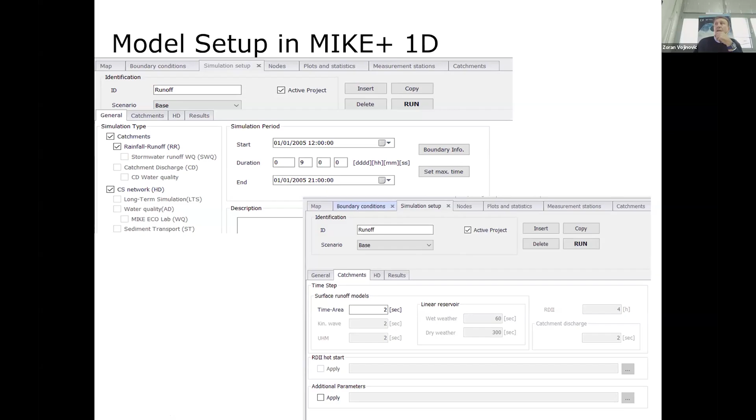This particular model has a variable time step. You may fix the time step, but still the computation is set such that if there are no rapid fluctuations, no rapid changes, the model will jump with larger time steps, and when the variations become finer, it will reduce the time step - which is very important for stable computations. So this is the time step setting, and as I said, you can use fixed or adaptive. Adaptive is what I just explained.

And then we press the run button, and then we get some results. This is the kind of report that you get - a small report that tells you how everything went through. It gives you any warnings, errors. If you have errors, then it won't run, but warnings will let you run, though you need to read them to see if something is an issue for you.

This is about simulating the model. Then you go into the hydrodynamic simulation, where you can tick and choose what sort of model results you want the model to report to you. You can get the data items for each node, for example, every link, and you can choose what you want.

And then finally, when you produce your results - first you have your hydrological computation, which generates a number of hydrographs equal to the number of subcatchments. Then you feed these subcatchments as the upstream boundary condition, starting from the rain and the rainfall runoff computation. You feed through your network, and then the pipe flow computation goes, and this is the moment when the Saint-Venant equations get solved, which we talked briefly about before.

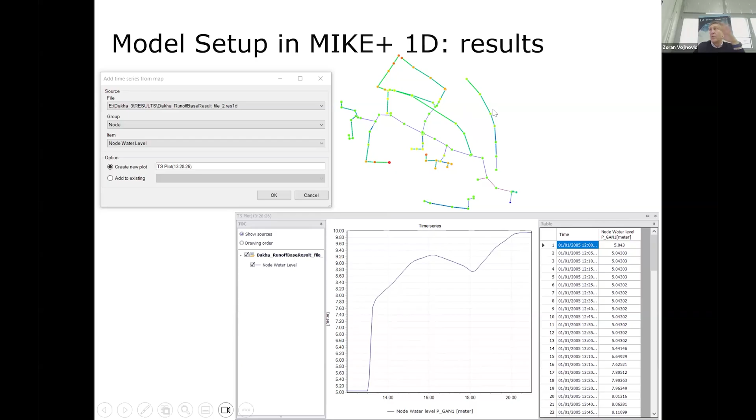So once you're happy with that, then you park your 1D model on the side, and you can go into your 2D overland flow model. So being so far in the MIKE+ environment, I will continue with the MIKE+ 2D overland flow model. In this case, we are starting with the terrain.

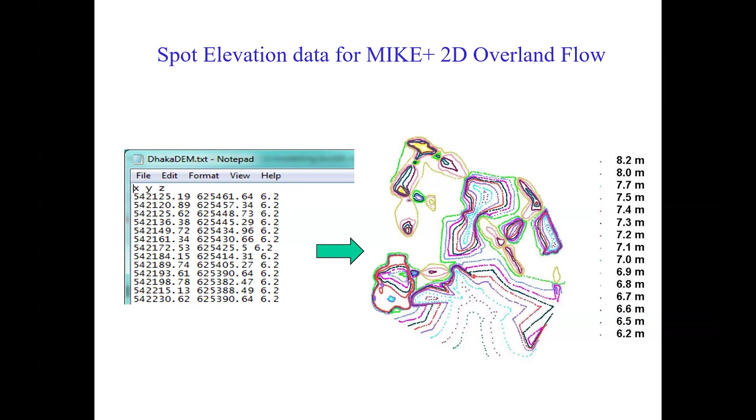So yes, we start with the spot elevations. In this case, if you come to Delft next summer, we will start this exercise from ArcGIS. So what we're going to do, we're going to start with the ASCII file, which contains XYZ data - X coordinate, Y coordinates, and Z being the elevation. And what you see here is basically a spot elevation data, which we will then process through ArcGIS and create continuous surface.

We move from the vector data, point vector data, we go to the interpolate and create the raster data, because the aim from here is to pre-prepare the 2D model domain and take it into the 2D model, which will be then later on coupled. So these are the steps that you would normally do.

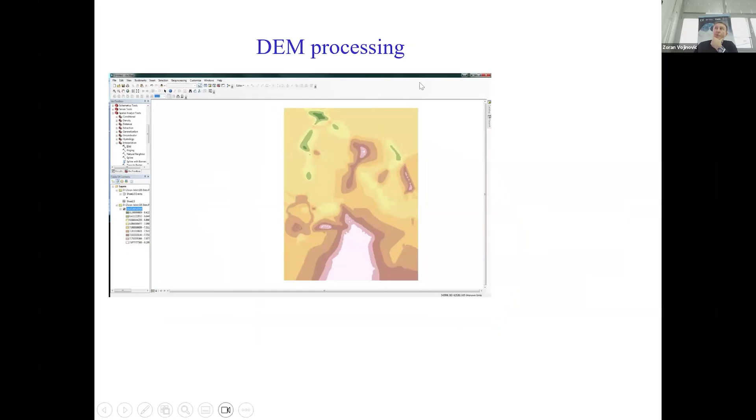You process your digital elevation model or digital terrain model. This is an option, of course, in ArcGIS, that you can create hill shade, and you can observe maybe, and you look if there is any anomaly that you need to particularly look at. If everything is logical and fine, then you may proceed with your DTM or DEM, whatever you choose to call it.

Then you may incorporate roads, road network, and the buildings, if you like. So the pinky area represents the road network, and then the small rectangles represent the buildings. And if you have your airborne laser survey data, you may filter the buildings, or you may retain the buildings, and you can create - I'll show you later how the animation from MIKE+ can be. You can use even the building heights. So this is again the DTM processed.

Now, when we are fully satisfied, maybe sometimes you may create different versions of your DTM. Maybe one just incorporating the roads, so the bare earth with the roads incorporated. Let's say the curbs are 20 centimeters high, so you can embed that into your terrain data. And then maybe another one you can create with the buildings. If you come again to Delft, we'll do both - you will practice to do that.

And then after that, you are ready to export that into the ASCII file. And then from there, which is a text file, you go into the MIKE+ 2D.

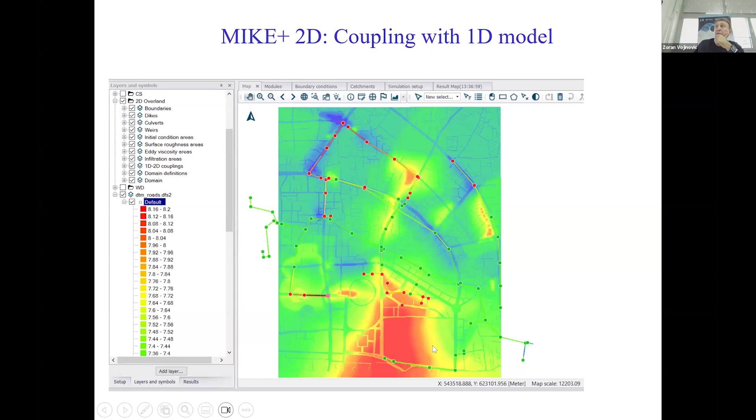Since this two-dimensional model comes from the coastal area, you will get bathymetry here, which is obviously in this case the terrain data. You can either approximate either having it through rectangular grids or flexible mesh, and then you will set up your 2D model, and then later you will also bring in your 1D model, but we'll talk about that in a moment for the coupling. So the coupling can be done at the manhole level, outlet, and so on. And then when you couple it, your 2D model raster representation with your 1D model may look like this.

A few more parameters we need to set in our 2D model before we can start simulations. Obviously, what makes a difference is what sort of values of your surface roughness you can put. Here I have an example of a 32 Manning's M value, or you can go with Manning's N, which is 1 upon M. But here is Manning's M, and what this means is that I have set the value of 32 throughout the entire 2D model domain.

So every cell has this particular roughness value. But if you want, you can vary it, creating different varying domains. So this is uniform, but otherwise you can have varying roughness values within your 2D model domain.

The next parameter you need to set up is the 2D eddy viscosity, and this parameter influences the propagation of turbulences in the water based on the velocity of flux. This parameter can be used to improve model stability very much, because you may get instabilities and your model may crash, so you can play with different values of the eddy viscosity.

The initial conditions are very important for the 2D model, in terms of wetting and drying you need to set up an initial water level. There must be some water level, you cannot start completely dry. So you need to start with some water level numerically, typically a very, very low value, but still enough to handle this wetting and drying problem.

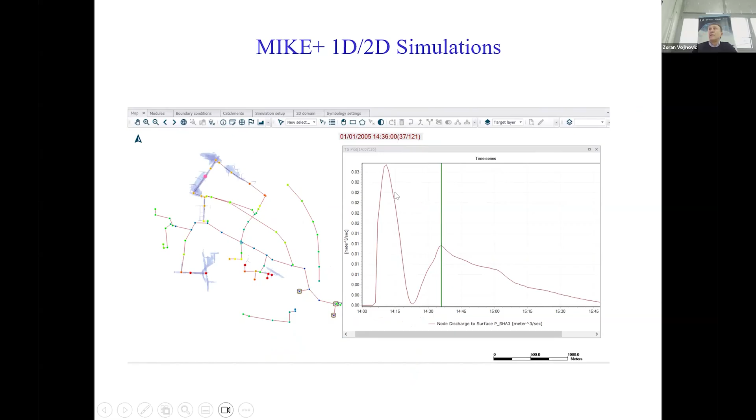The blue represents the water depths computed, and the darker the color, the more deeper the water. You can navigate throughout the entire simulation period. The green vertical line represents where you are at that particular point in time through your simulation period, and then you can see how the peaks represent the highest computed water level in your simulation.

And then finally, so when you set up your 2D model, starting from GIS, bathymetry, DTM, we talked about the 1D model, you couple the two together, you run it. You can also create from this 1D, 2D computational framework, a 3D visualization.

This is typically done in Mike software through Mike Animator Plus, which is a quite straightforward software to use. Once you generate your result file, you bring it into this environment, and it's very straightforward to create something that, for your communication with stakeholders, might be useful because people can relate in 3D where the flood goes.

This is an example from the Mike Animator where you can see the 1D, 2D model. So the flood propagates through the urban area and goes around the buildings. And then you can also zoom even further into more zoomed locations, and then you can try to relate how this works.

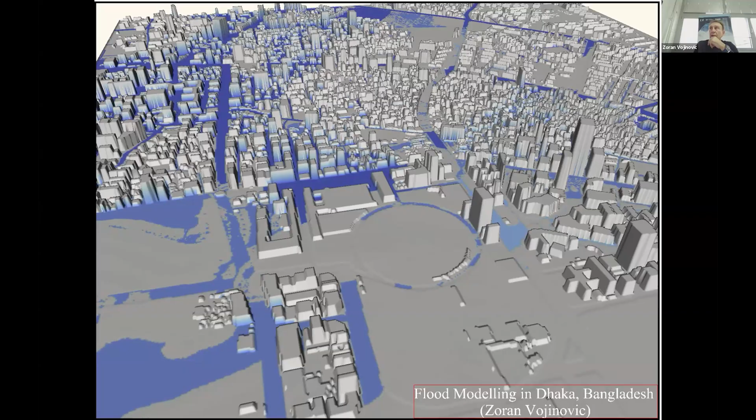This is, of course, powerful to do with buildings, but then when it comes to depth damage assessments, your buildings can represent a challenge to compute these depth damages. In that case, maybe you want to remove the buildings, because then the water that gets on top of the footprint of the building, that depth will be used to calculate the depth damage values.

So then you may get some results like this, and that's pretty much where I'm going to stop with this discussion on the Dhaka case. Of course, we did here the water modeling and so on. I think we are going for another probably 10 minutes, I would say.

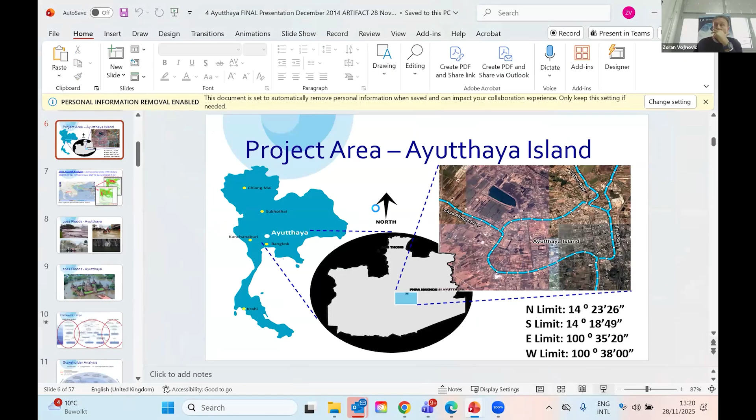I will show you, so this was the Dhaka case. Of course, we can discuss that further, but I will show you very briefly one more case which follows a similar pattern of model setup and everything. This is for the case in Thailand, where we worked straight after the 2011 Thailand floods. So what you see on screen is the location of the study area. This is Ayutthaya, which is about 2 hours north from Bangkok, and this area contains 3 rivers, and they call it Ayutthaya Island.

So there's an urban area within, but it's also a very, very unique area because it's really culturally, religiously, spiritually important for Thai people. It's a very important area, it contains, it's also a UNESCO heritage site. It contains very interesting objects. It used to be the capital of Siam in the 15th, 16th century, and then later moved into Bangkok. But this area is highly touristic, very attractive, and also very important for Thai people. And in 2011, it was severely flooded.

So we did some work there. There were 5 storms that occurred in that period in 2011. This is how that area looked like in Thailand. The water remained on the ground for a period of 3 months. In some places, it remained with a depth of 2-3 meters for all that period. It was really significant damage and impact on the population and everything.

This is what I'm talking about, a UNESCO heritage area. The area is normally dry, but here you can see how the flood waters have come very close to these monuments and objects. So we did a study there where we looked into the flood risks.

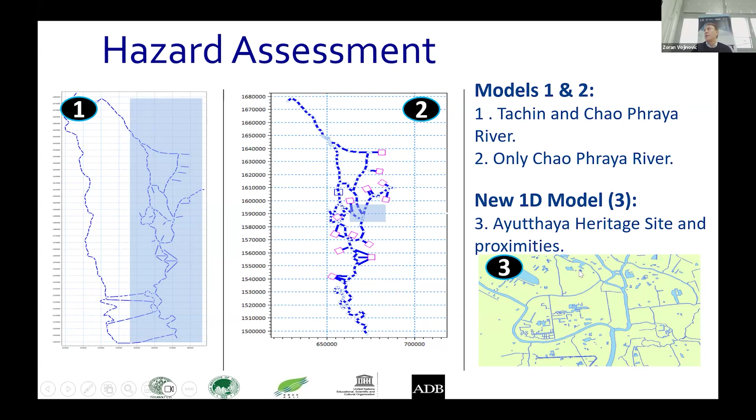This is Ayutthaya. So what you see here is basically going from one 1D model to another 1D model, and going to 1D-2D, which is situation 3. I'll quickly show you how this looked like.

We ran different options. This is 1D and 2D, and I'll quickly just run the one.

Just a moment, training... yes, it's in here. Just one second, yeah, this one. Let me open up with the right file. Reference, open with. Doesn't want to - if I try to open it like this, it will not work, I think. I just want to show you. No, it won't work, but I need another. Open with, yeah, this one, sorry - yeah, this one, I was opening the wrong thing.

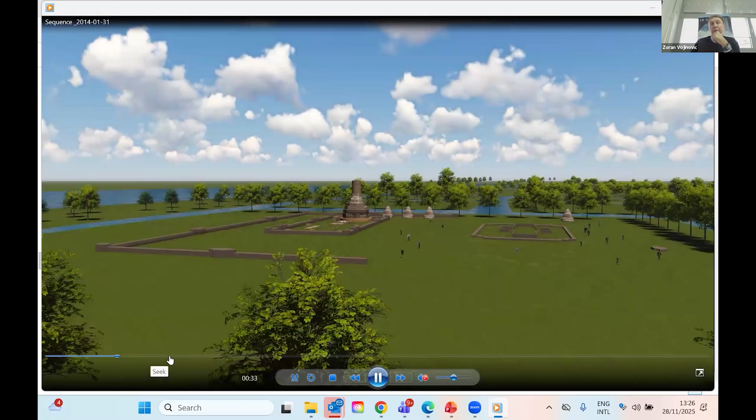What you see here is another MSc work of one of my students from Thailand. She took the 2D model results into landscape architecture rendering software, which speaks more than just looking at the Mike Animator or 2D flood maps in GIS. So she developed this.

So what I'm trying to say is that 2D models are good, they produce nice results in a 2D visualization framework in GIS maps, but maybe not always easy for everyone to understand, particularly without a technical background. Moving to 3D animations, using this kind of software to turn 2D model results into landscape architecture software, may be even more useful. This is what we found in Thailand to work very well to communicate 2D model results to the stakeholders.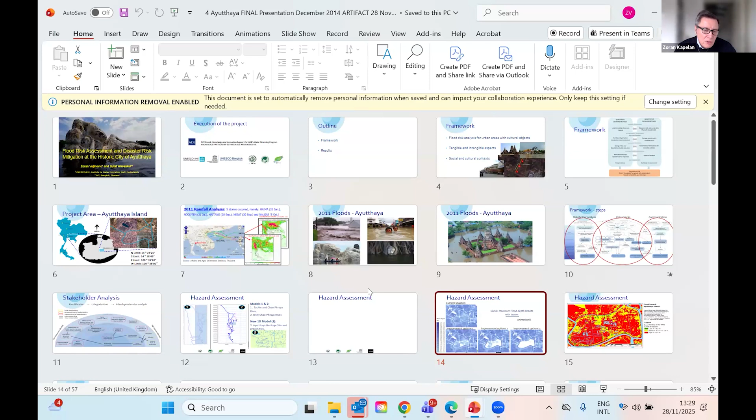Okay, whilst you're thinking about this, maybe I can ask a question related to this last part, the visualization. I know quite a bit of work has been done about this, and it's a very important part of conveying the message about the floods. So what do you find so far to work the best, these kind of animations you showed us toward the end? It depends. Some people are doing augmented reality, literally taking a video of the area and putting artificially the water level, how far the water might stretch. What is your experience with this, what works best and what is currently available?

Well, it's a very good question. It depends who you're dealing with. If it's a technical audience, people with a water background, water engineers, then navigating through GIS maps and showing discharge hydrographs can be sufficient and effective. However, if you work with a larger and diverse group of stakeholders, like in this project where we had 33 community groups plus people from UNESCO and the Ministry for Culture, we found that turning all the 2D model results into this kind of representation was quite effective. People could relate, they were impressed with the work, and could provide more structured feedback on what they liked or disliked, and how they perceived the future with a particular measure or another. So it worked quite well for us, but again it depends who you're dealing with.

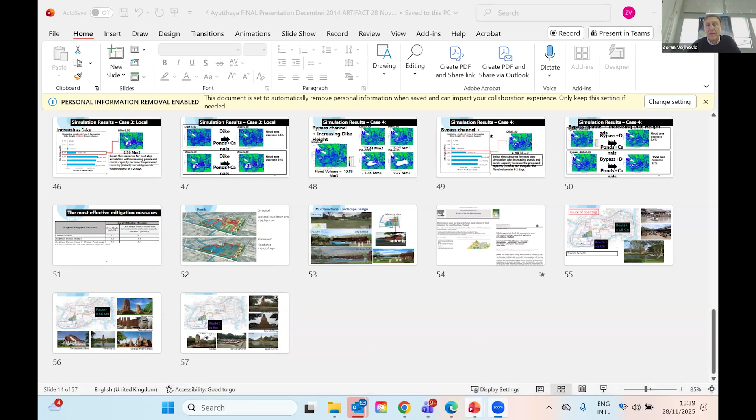If I may just say something, if nobody reacts. I can see that we have a bit more time because Natasha's slot was planned, but we have another maybe 15-20 minutes. I can show maybe one more case, or we stop here, I'm happy to do both. It depends really on what people want to do. If there are no further questions, maybe you can do another 10 minutes of presentation, show us one more case, and then we can wrap up the training. Exactly, yes, because I know Natasha would have given some interesting presentation by now.

Okay, what I'm going to do now is jump into... we're going to now fly over to the Caribbean region from Asia.

Let me see what's happening here. Okay, yes, we're going to go to Saint Martin. Saint Martin is an island located in the Caribbean Sea, sharing administration between the Dutch side and the French side. What we're seeing now on screen is the view towards the Dutch side. It's a beautiful island with pristine beaches, but of course, being in the tropics, it suffers from tropical storms and hurricanes.

So I want to show you how 1D, 2D models can be set up for flood purposes on the land, but also how you can add the coastal component. Here we have added the coastal component, and we have run simulations with hurricanes for the purpose of flood risk assessment.

Zoran, sorry to interrupt, maybe just go to the display settings so we can see a larger view. That often happens, let me see. Yes, sorry that I overlooked that. No, that's good, yes, okay. Yeah good, it's better now. Okay great, so we are moving through there. So this is Saint Martin on a nice, beautiful day.

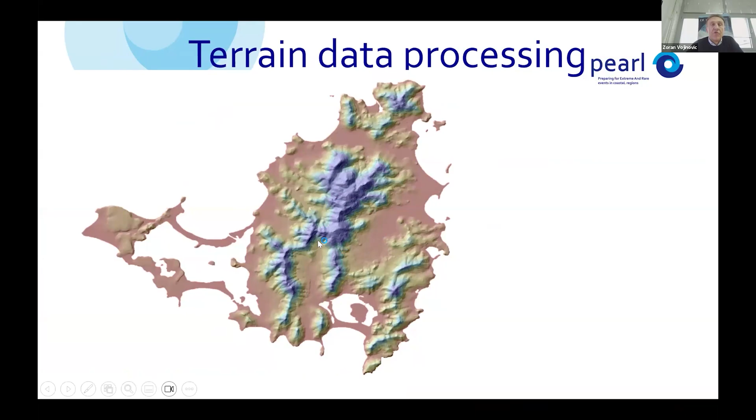So what you see here is the terrain data. Obviously, the bluish color represents the hills, and the topography of the island is quite hilly, so you get this flash flood type of effects. But the island also has some streams, water courses, not really massive rivers, and they have some drainage problems.

What was interesting to think about when doing these 1D, 2D model studies was to develop scenarios for the existing development situation and also for future development. The existing development in the sense of the percentage of imperviousness currently present on the island - you get this well from the satellite images, and you can define the degree of what's pervious or impervious.

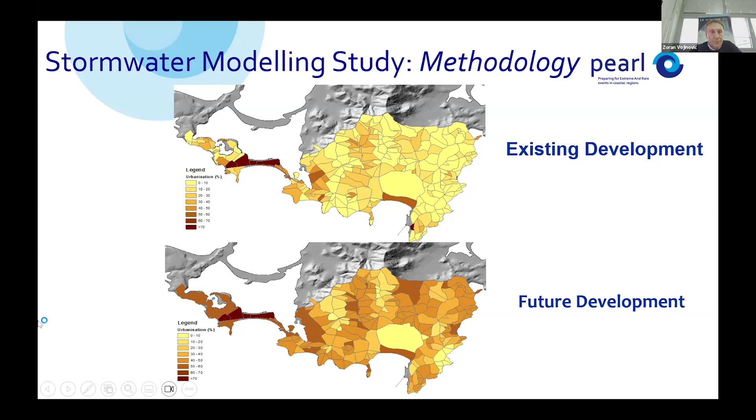We worked with a 10-meter DTM, by the way, that was done quite some time ago to start with the terrain, but then we also went into the sea to extend the model, to run for the hurricane simulations.

What was also interesting there - we had a challenge. There was a need to set up these models as soon as possible because the island government wanted to look into some no-brainer measures. So we didn't have time to do measurements for a long time, so we went with a kind of model validation rather than calibration.

We came to agreement with this model validation. We went around the households, talking to the people who showed us the watermarks, and used that to calibrate the 2D model, because it's really challenging to calibrate a 2D model. In closed or open channels you can put different instruments and measure, but the 2D model is always a challenge. So we used the eyewitness records as the source of information to calibrate the 2D model.

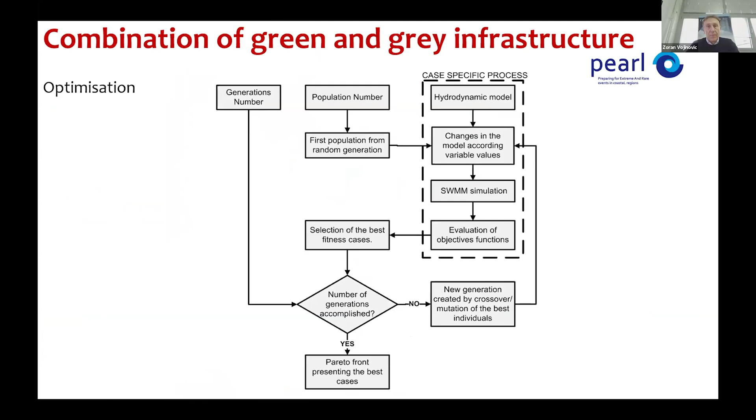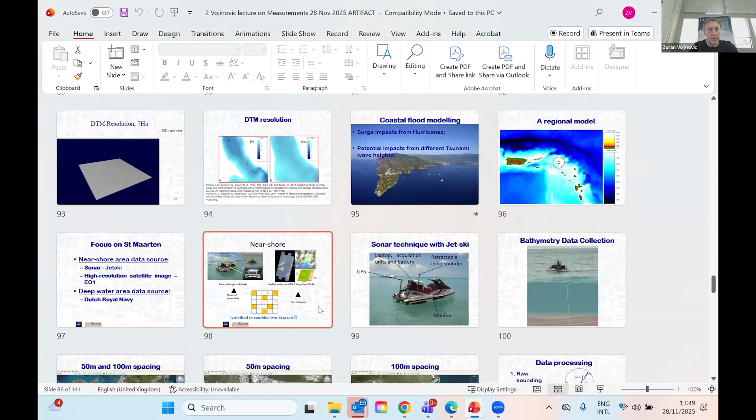But then we go further, and I want to show you one more part, and I'm done. It is how we went with the bathymetry. So we set up - this is interesting maybe to say - we worked on the bathymetry data together with people from the Dutch Royal Navy.

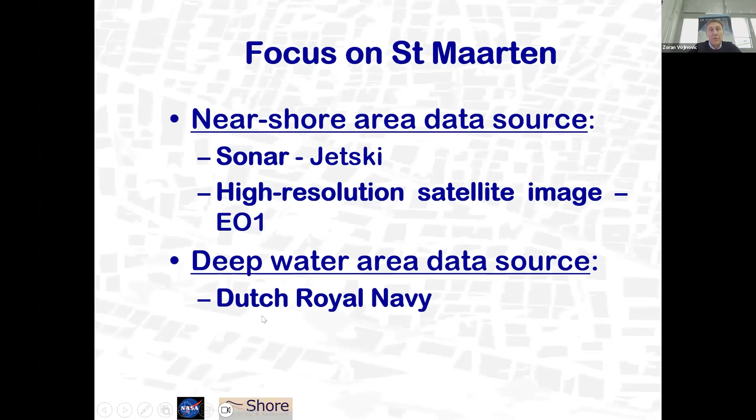I personally had access to their EO1 satellite. Every night before the satellite would pass the next day at a particular time, I would look into the weather forecast and decide whether I'm going to use the satellite images. This is a high resolution satellite image, EO1, to get different values for the waters, for the bathymetry. Then we used jet ski measurements to measure the actual depths and cross-correlate these two. For this purpose, we used the support vector machine to digitize the bathymetry, which we then brought into the 2D model and used as a basis to simulate hurricanes.

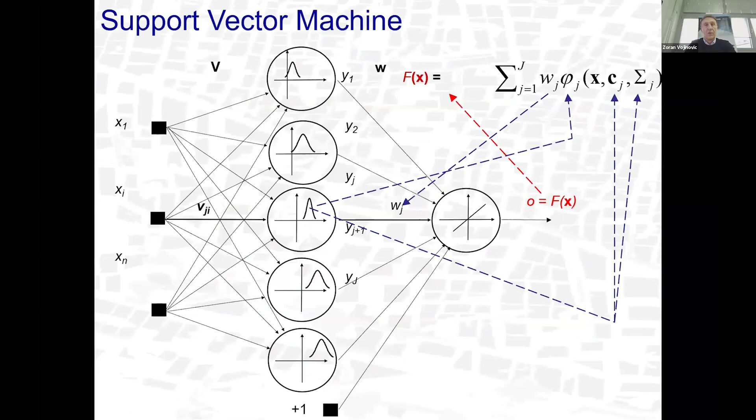With this, we produced - I'm not going to go into all the data processing - but we came to the point of using the support vector machine to interpolate the data, and it worked quite well. We got a nice smooth area and built it into the coastal model.

I'm going to show quickly how that looked in a simulation for Irma. Yeah, this one here. So now this is the 2D model running the simulation.

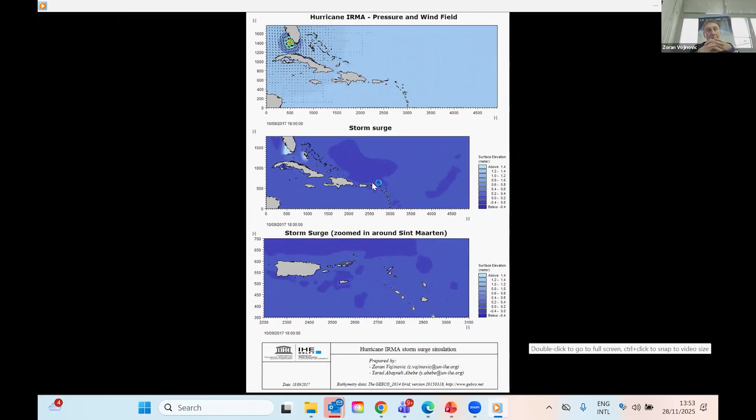In the upper part, you see the wind effects, and then you see the storm surge pulling up, and how it approaches next to the island of St. Maarten, which we then used as a boundary condition for our more detailed model around the island, containing also a 1D network and 2D terrain. But this coarse model could not be coupled with the 1D model, so we used it as a boundary condition for the other model to simulate how the storm surge can affect the island in combination with rainfall-induced flooding. This is an example of how 2D models can also be used for coastal applications.

And we have also extended this application into the sewage, and I'm finishing here.

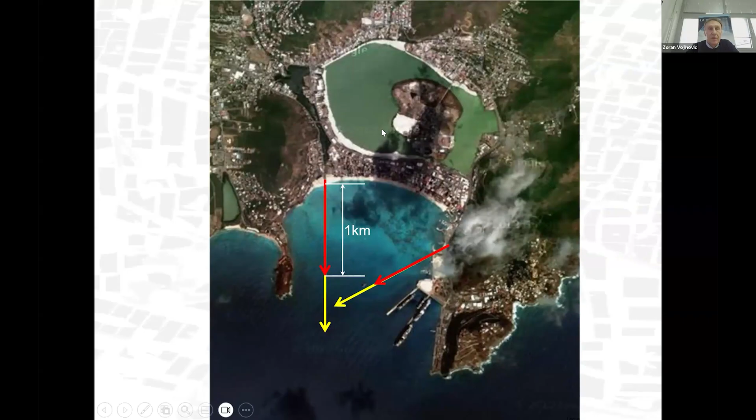For the sewage measurements, they have two outlets causing pollution problems in this bay. So the island government asked us what to do with the sewage. Can they continue discharging? They also have a wastewater treatment plant, but during extreme events like hurricanes, they would dump sewage during emergencies into this bay. They asked us to look into extending the outfalls into the deep sea. This shows the possibilities for deep sea outfalls and how the effects would look.

Then they asked us to model another scenario, to extend the outlet further into the sea, because with the salinity, temperature, and these effects, the concentration of pollutants would be processed by nature.

Then we came up with the optimal configuration. This shows that if they extended the outlet to this point, it's also not good, because of the bay configuration the pollution would still sit here for a few days. So if they wanted to do that, they would need to extend it a couple more kilometers deep into the waters.